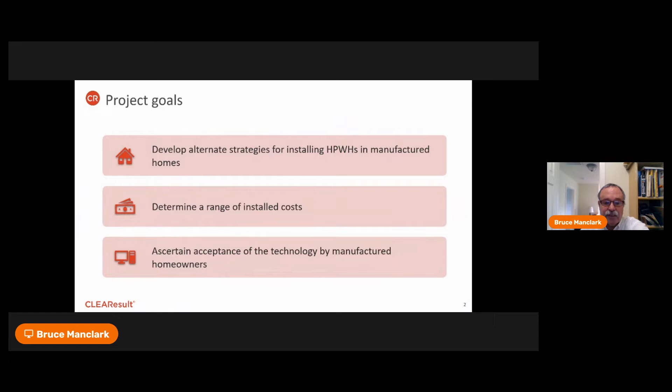These were the project goals. We wanted to really figure out how to put heat pump water heaters in manufactured homes. And we also wanted to determine a range of installed costs. A warning here, all installed costs that I'll show later on are not adjusted for the last year rapid increase in prices, especially with heat pump water heaters. Now, also, we interviewed the consumers at the end to see if we drove them crazy or not by putting a heat pump water heater in their house.

Not to get all Dick Cheney on you, but sort of, the unknown unknowns, right? Stuff that you should have known. Site selection, boy, we learned a bunch there. Breaker size on manufactured homes was a surprise to us. And whether it's rear discharge or side discharge was also a big surprise. Costs, we're saying it's anywhere from $300 to $700, and that would be excluding any electrical upgrade, which would be probably around $500. And to give the answer away, we had high customer satisfaction off these.

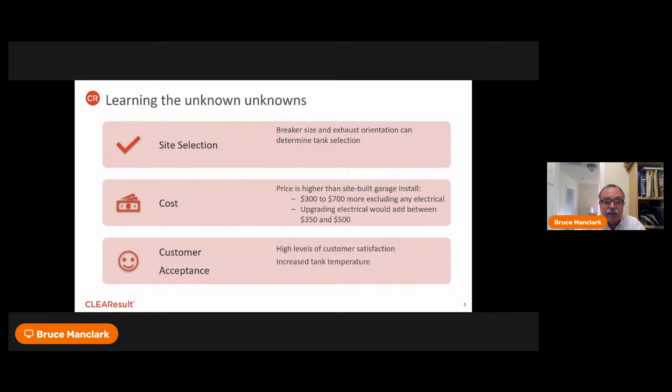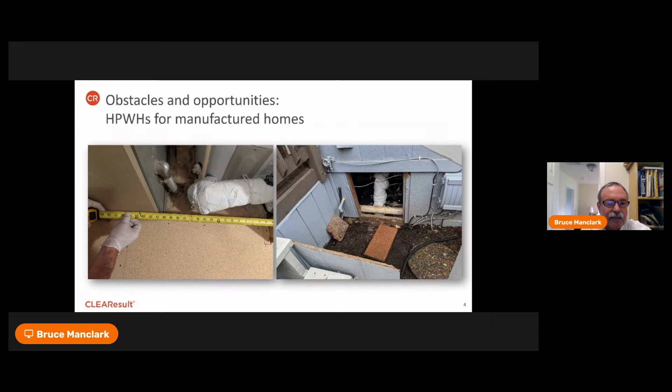For those of you that have not worked in manufactured homes before, it's by definition tight spaces. I mean, there you have the crawl space underneath the house. And of course, you have the main line there and the sewer line and everything else running to get in your way. Just for those of you who don't know, manufactured HUD code homes do not require an isolation valve for the water heaters, which complicates things like draining the tank, obviously. And the closets they're put in are always tight.

Yeah, guess what? Rather than having a 30 amp breaker like most site builds in the Northwest, these had a 25 amp breaker. And the implication of that was we either called an electrician, again, maybe at a $500 cost, or choose a tank that will accept the 25 amp breaker. And there's one of them out there.

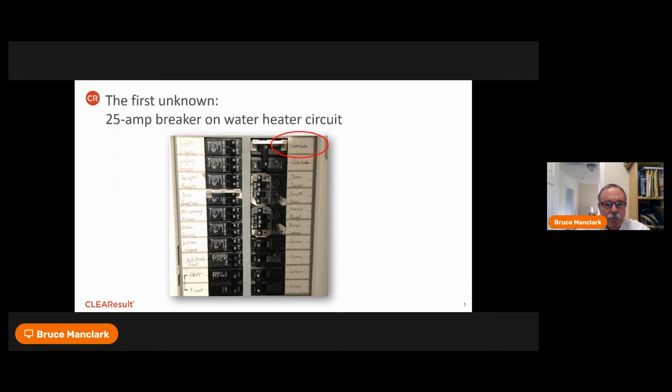Utility room example, just to kind of give you a feel here, more tight spaces, and the technician on the right-hand side has a jigsaw out, and we had to enlarge the opening of the closet in a lot of these homes just to get the tanks in place.

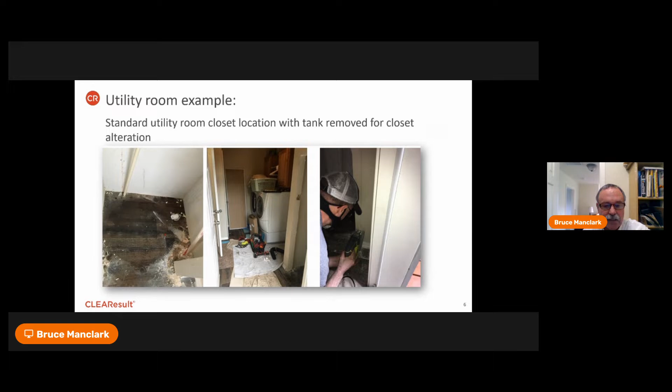This was sort of a really nice example, and I'm going to spend a little bit of time on here. The real use of the installation pad here was to get around the fact that the plumbing comes in from the bottom, and the heat pump water heater with a pan underneath it had a wider base, so they weren't exactly aligned to go up. So basically what that pad with that notch allowed us to do was come out and over.

Another thing we found out about HUD code is, despite the fact that they go on pressboard floors all the time, they do not require something as simple as a drain pan.

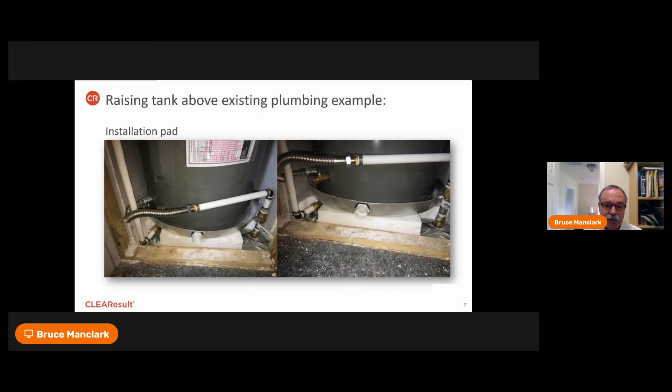If you are going to duct it, especially on a side or rear discharge, you have to allow for at least 5 inches for the duct adapter itself. I think one of the major manufacturers is going to come out with a unit that's going to be both intake and exhaust ducted off the top. That would help us in several locations in regards to space.

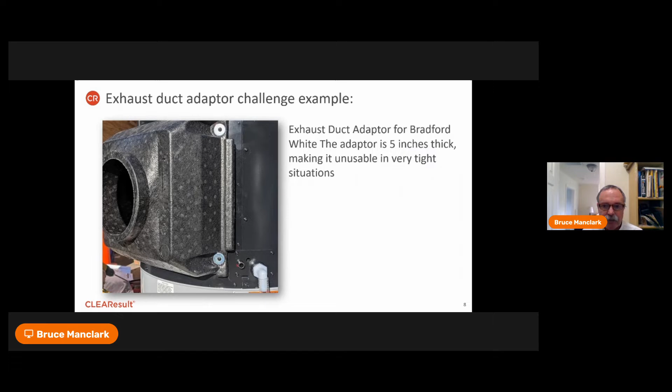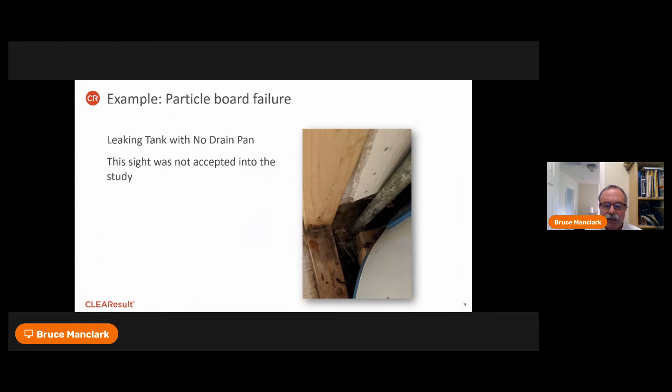Okay, I wish you could see just how rotten this floor really was. They had a small leak, and basically, if we had to repair the floor, we stayed away from that site. And unfortunately, there were quite a few that we did not accept in the study, just because of that rotting floor problem that something as simple as a drain pan would have probably addressed.

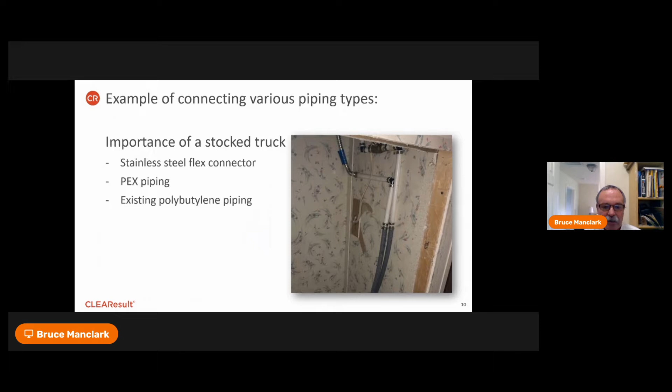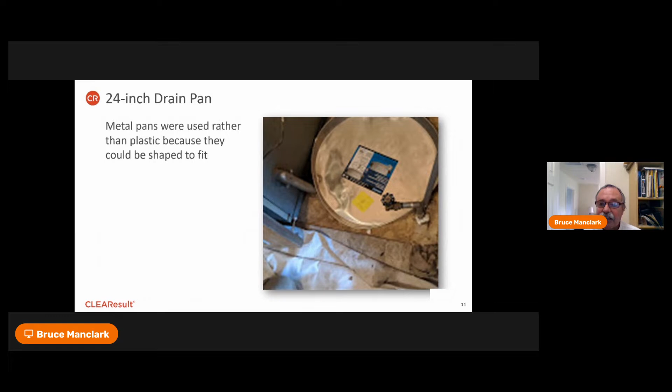This is a picture of a drain pan that looks like it's beaten up. The reason it looks beaten up is because we had to take a hammer to it to get it fixed. And this is a good reason not to use plastic drain pans, because they're not as malleable, and hitting them with a hammer doesn't have the same impact. So, this was at one of the few houses that had an isolation valve. It doesn't look like it came from the factory that way, though.

If you are going to install heat pump water heaters with ducting, the plumber also has to be a reasonably good carpenter. And this individual was one of those. This was a double ducted job, and this was in a bedroom closet towards the end of the manufactured home. We called it double ducting, where we took the air from outside and we deposited it back outside.

These homes were in Western Washington, where we have fairly mild winters. If you did this in a colder climate, you would probably hit the compressor shutoff temperature way too often, and you'd be operating as an electric resistance water heater quite a bit.

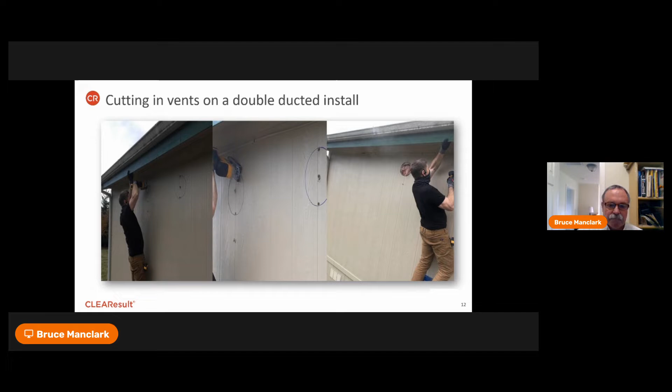Even some of the duct adapters, in order to fit, require just a little bit of modification. I think if I have one big takeaway from this, if you're going to go to non-standard installs, the installer has to be creative and up for the challenge.

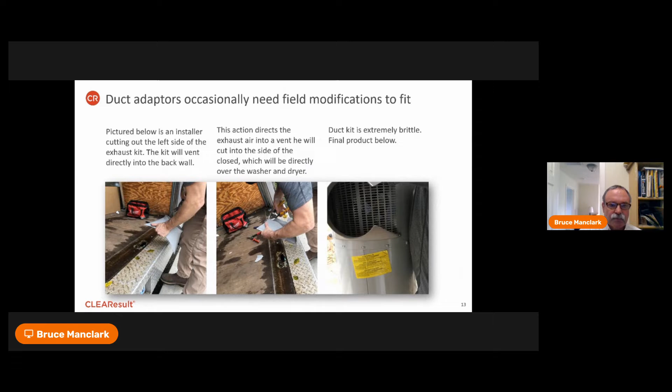The install sequence, we did a lot of screening. We did a lot of virtual screening, and the individual that worked for us got really good at it. We do have remote screening software that we use. And basically, right off the bat, we looked at breaker size. We looked at how big that closet was. We had them get the tape measure out so we could figure it out.

We looked for floor damage. And of course, we got their consent, saying, hey, do you mind, we're probably going to have to make your closet a little bigger. So we got some consent there. And then when it came to tank selection, the important part was the breaker size.

The size of the household, that kind of got us a surrogate for how much hot water they use, and whether it was rear discharge or side discharge. And again, a tank that discharged and took the intake off the top would have given us more flexibility than we had at the time.

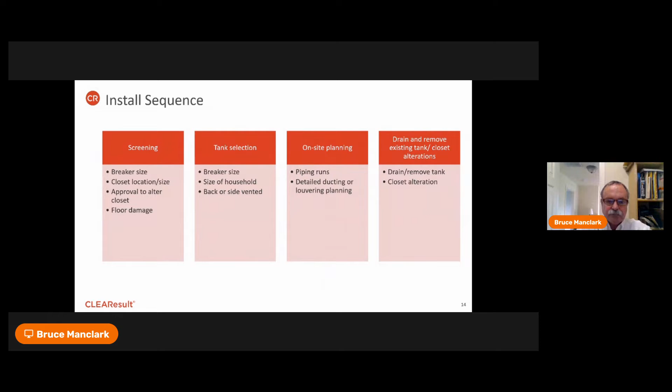Once we got to the site, again, this was really up to the installer, but we figured out the piping runs. I helped with any louvering or ducting that we had to do. Then, of course, it's drain, remove tank, closet alteration. And again, if the house didn't have a control valve at the tank, that meant you had to shut off the water supply to the whole house. And we modified the closet as needed.

Install sequence, it was, install the ducting, or any louvering. We did that drain pan installation at that point. Sometimes that hammer was required. Placement of the heat pump water heater, lift tank into place. When you've got a drain pan sitting on a piece of styrofoam and a narrow space, it's kind of hard to get a hold of that.

We never did investigate the water tank lifting devices, but I think if we did it again, they would have come in really handy. And of course, you have to orientate the tank in the right position, connect the ducting, do the plumbing, fill the tank, connect the PT, drain, and condensate lines, which sounds easier than it actually was. And then commissioning, where you wire, energize, check for leaks, and observe the startup sequence. The one thing missing here is the step of customer education.

Methods to overcome that restricted space. Basically all the manufacturers right now are around 700 cubic feet. So by definition, we had to overcome restricted space or volumetric constraint on every house that we went to. 3 of the homes we did double ducting, intake and exhaust. The most common one was inside to inside.

One of our favorite techniques was to take the air out of the utility room, which sometimes had the electric furnace with the water heater, and we dumped that air, if it was connected to the kitchen, right behind the refrigerator, so we wouldn't get any "gee, you're blowing cold air on me" complaints. Inside to outside, this is my least favorite form of ducting, especially in cool and cold climates. You're really adding to the infiltration load of the house when you do that. And then we did some creative louvering on 4 of the units also.

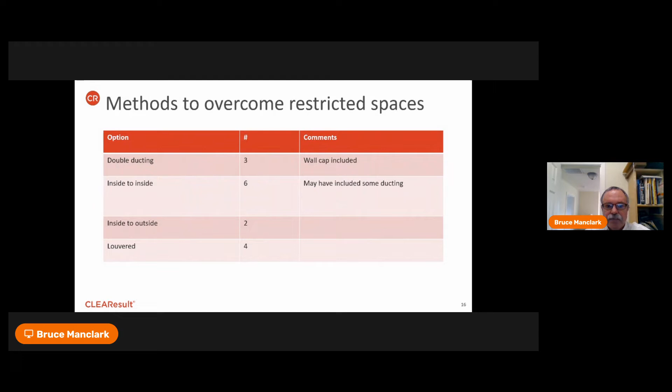Here's a nice example of us modifying a closet. Basically, we took one whole side out, and that allowed us to orientate the tank in a way that made sense. And this is an example of where we took the air and discharged it directly behind the refrigerator, which was in the adjoining room in the kitchen. You can also see here in that lower right-hand corner and the door in the right-hand picture, that's a return for the furnace. So we did have a built-in louver, if you will.

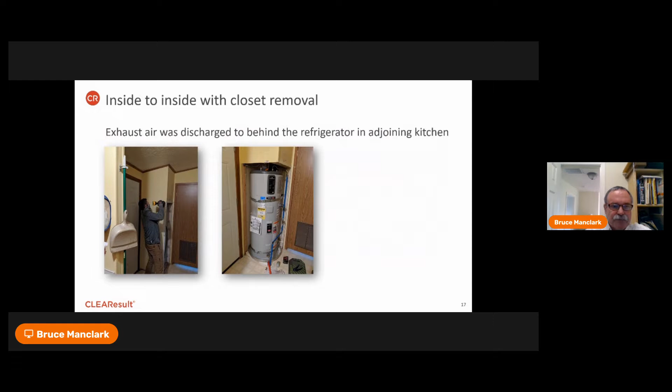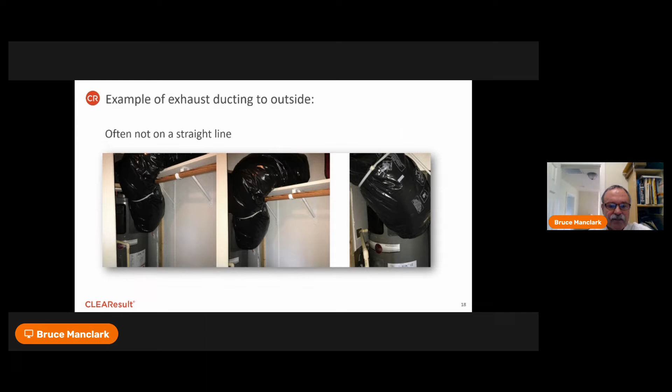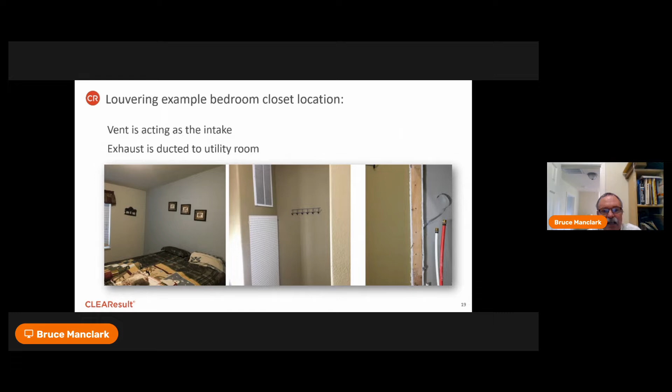Louvering, this was interesting. The pegboard was already in place on the lower half, and we added a nice big, essentially an HVAC return grill going in there. And we exhausted the duct back into the utility room. So that both these served as the intake, and we had an exhaust going out.

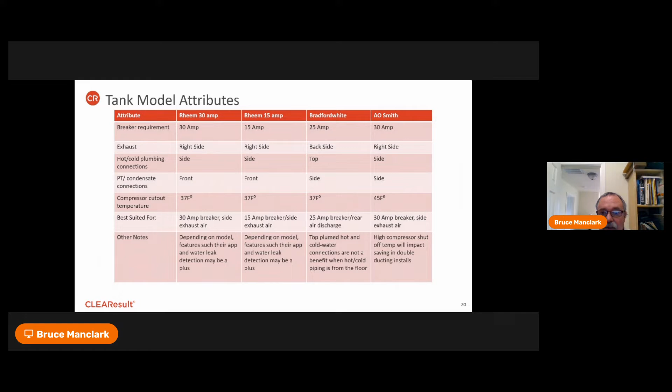A lot of information on here, and I know these slides will be given out. These were sort of the tank model attributes, and the one that we used was the Rheem 30 amp. This chart shows whether it's right or rear discharge, etc. Hot and cold plumbing, whether the plumbing's on the side or if it's on the top, what the compressor cutout temperature is, and sort of what it's best suited for. That one Rheem 15 amp, it was for a single person household. And the big difference there is that we only needed a 15 amp breaker, and the load of the house was really quite small.

Tank selections, we used one A.O. Smith product, and that's where the homeowner installed their own 30 amp breaker. I'm correcting myself here. The one Rheem 15 amp was a 2-person household, but still they didn't use much hot water. And the Rheem 30 amp, where again the homeowner switched out the breaker, and then just because of the breaker amperage, we used 12 Bradford White products.

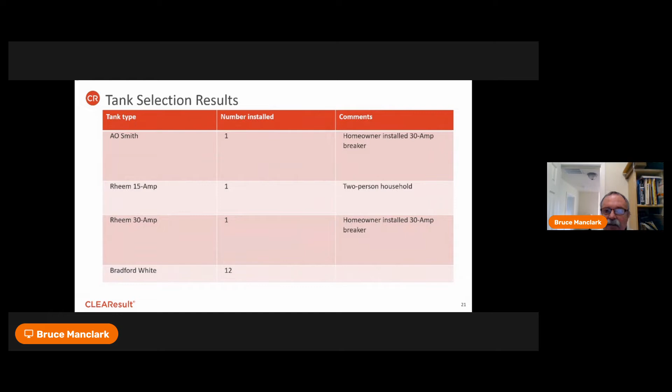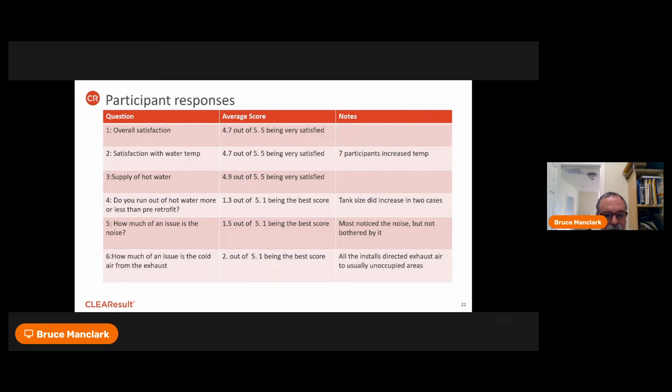And then the last question was, does the cold air coming out of it bother you? We got a slightly higher score there. We got 2, but we did our best not to blow cold air on kitchen tables or where people watch TV. And again, behind that refrigerator seemed to be a successful tactic. This ended up being the tank selection that we had.

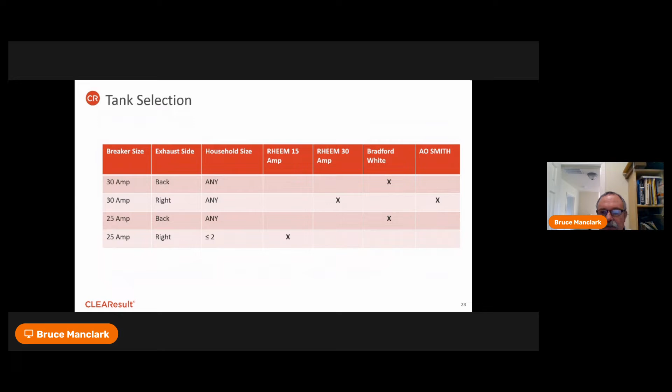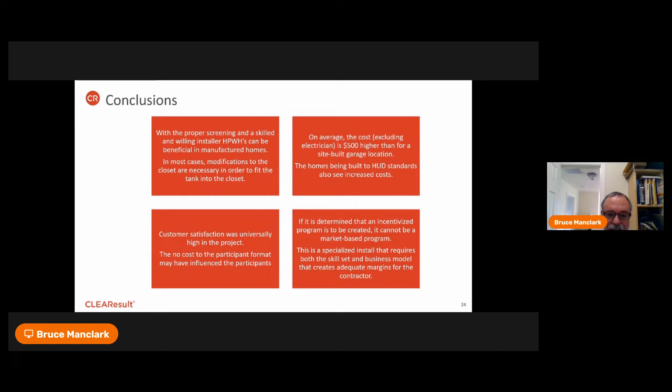And if you want my personal opinion, this is not a program that is for every installer. I don't think it's going to be a market-based program. I think you want to create a fixed price offer and go out and recruit manufactured homes and give that homeowner a really good deal. It must fit the skill set and the business model of the installer. Or I could just say, if we picked the wrong installer, this project wouldn't have worked.

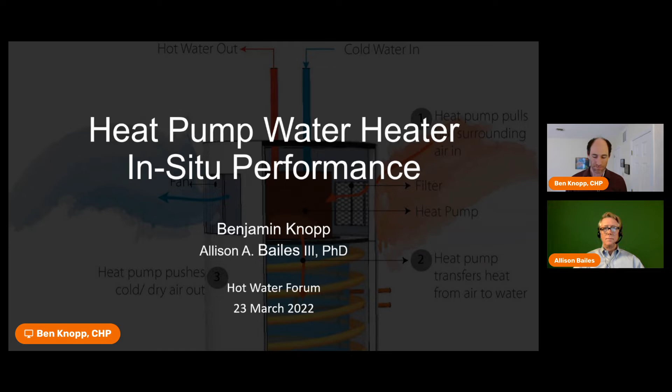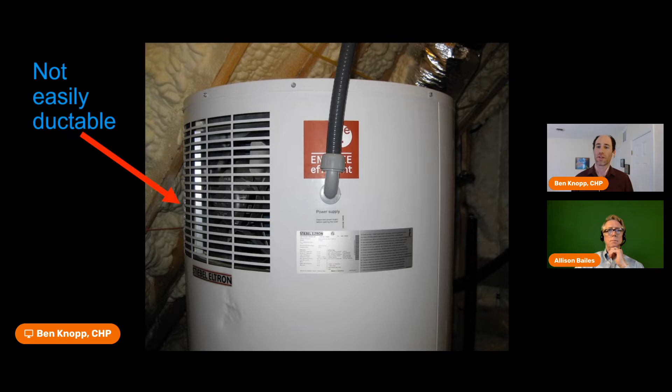So what we've done is analyze data from installed heat pump water heaters, and we'll get right to it. In this study, we're looking at just packaged heat pumps, so we're not looking at any split heat pumps. But the two basic types of these packaged heat pumps are ones that are not so easily ducted and ones that are easily ductable.

Just for those of you who aren't very familiar with heat pump water heaters, they draw in room air and have a compressor inside that concentrates that heat down into the water, and then they blow out cold air, and when it's humid, that air becomes dehumidified somewhat.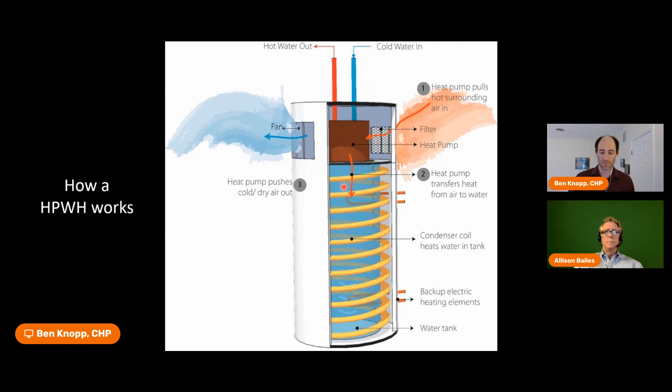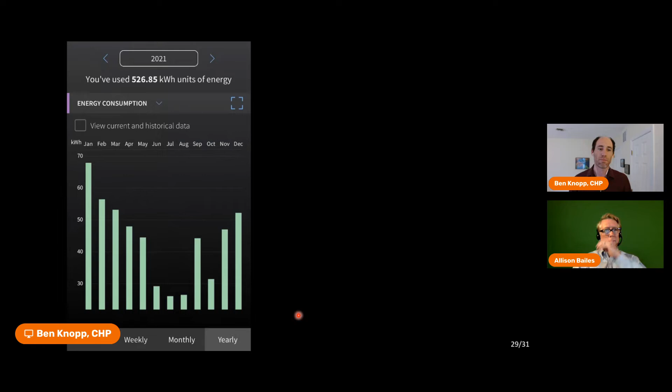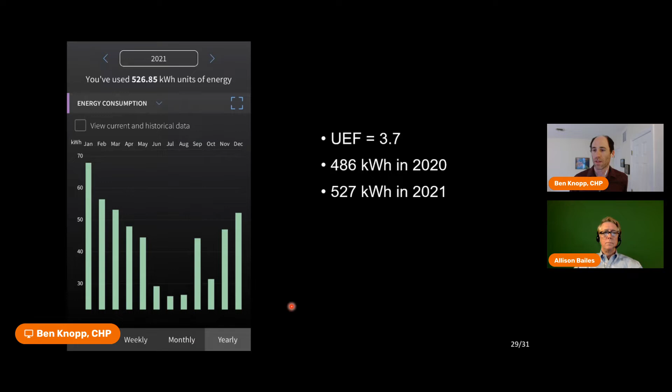So his is rated with a UEF of 3.7. It used 486 kilowatt hours in 2020 and then 527 in 2021. This is a couple years of data, I guess. And we talked about that jump in September. He had a 3.5-year simple payback for his water heater.

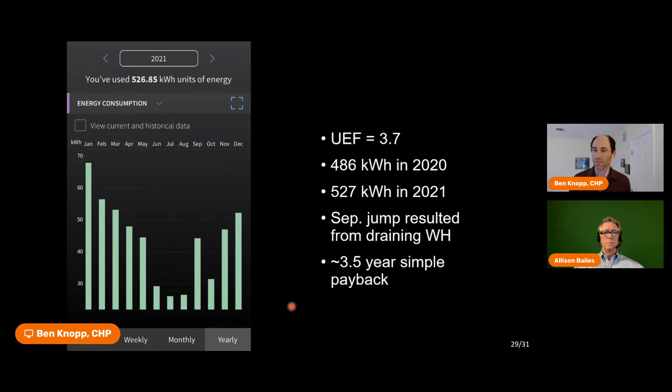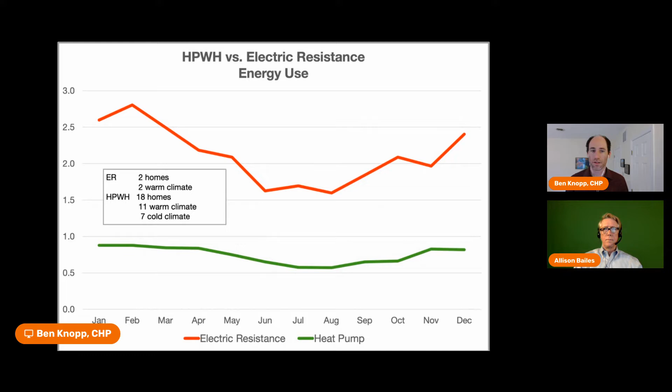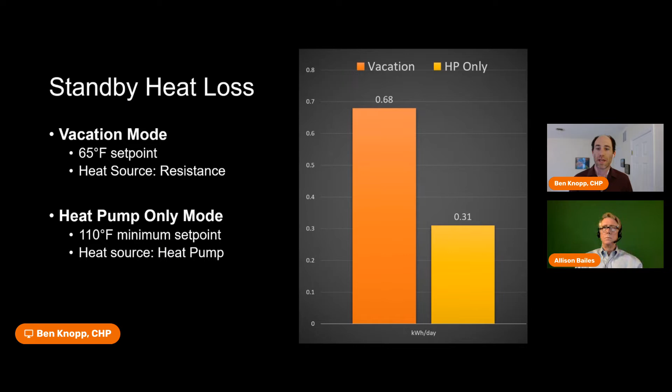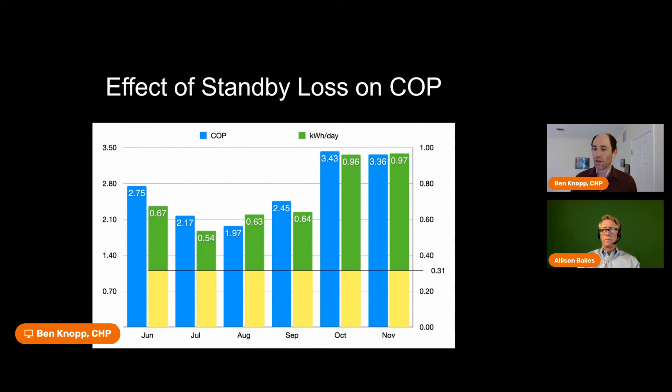Another interesting thing is that a lot of people, when they think about heat pump water heaters, they're like, oh, it's robbing heat from my space. Oh, my heating system has to make up that heat. What's interesting is you don't hear that a lot about refrigerators, which are very similar, but just the opposite. They're adding heat to your space. But you don't generally hear people saying, oh no, is it going to overwhelm my air conditioner? And is it going to make me super uncomfortable to have a refrigerator right in the middle of my kitchen

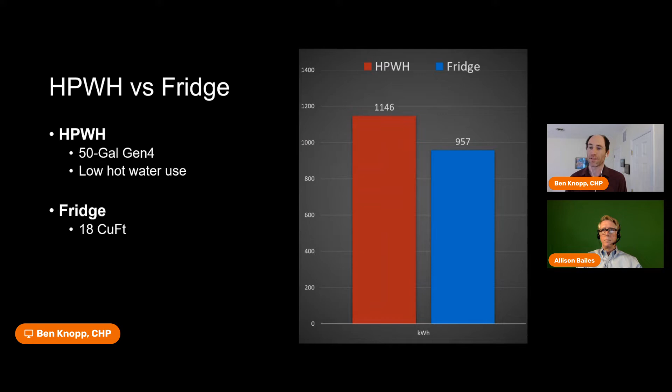So one myth that we like to address is that heat pump water heaters are just for warm climates. So what we did was just analyze a cold climate. We took Anchorage, Alaska, and used some incoming water temperature models from the Florida Solar Energy Center that allowed us to map what the incoming water temperature would be. We took into account the extra heat that would need to be added to the home in Alaska throughout the year. And we assumed a cold climate heat pump with electric resistance backup heating to make up the heat that the water heater stole from the air.

Assumed 300 days of heating up there in Alaska and an average water temperature of 43.3 degrees, and still had a COP of 1.72. So still, from an energy standpoint, still beneficial in a climate as cold as Anchorage. So we wanted to point that out.

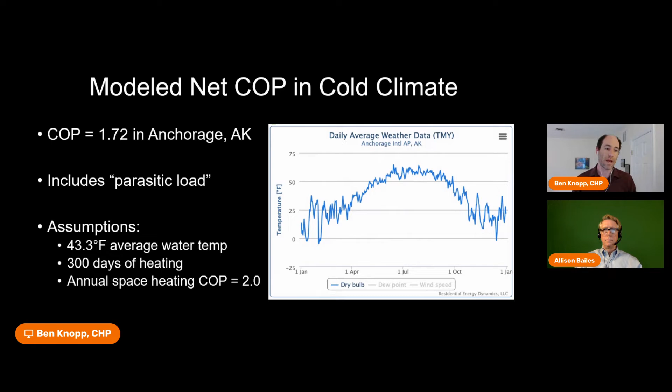Also wanted to have a look at how filtration impacts the airflow of a heat pump water heater, and look at its impacts on keeping the coil clean. So we measured a couple Rheem 4th generation heat pump water heaters with a clean stock filter and got 125 CFM and 130 CFM. And the settings indicate that the fans have 2 speeds, but we've only ever observed low speed.

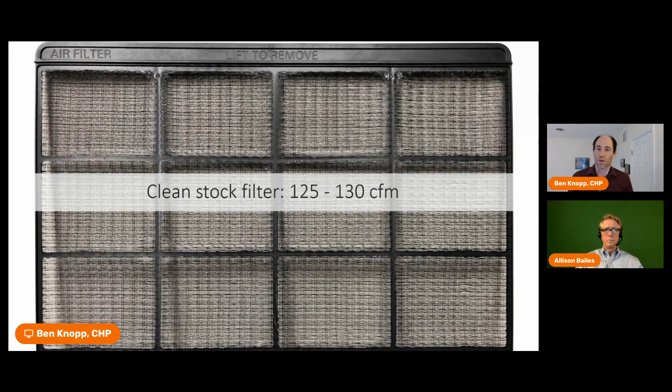So an experiment that we did was duct it to a MERV 13 filter, which might sound crazy, but it was oversized, so a 12 by 24 by 2 inch MERV 13 filter, and it had a very minimal impact on the overall airflow. Knocked it down to 121 CFM, so like a 3 to 5% drop in total airflow through the heat pump water heater.

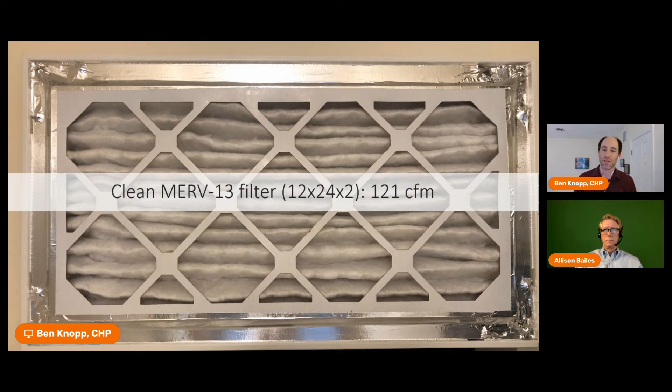Then I left the filter for almost 3.5 years without changing it. And this is what it looked like at the end of its life when I decided to replace it. And I measured the airflow, and it was still 119 CFM. And all these airflow measurements were with a highly precise powered flow hood, so they're extremely accurate airflow measurements. So yeah, that's a pretty nasty filter, but still moving a perfectly fine amount of air.

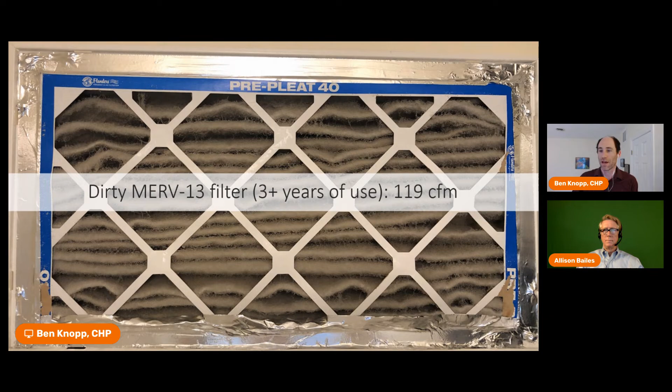So, conclusion on that is the stock filter does a decent job. If you want to keep your coil pristine and not have to clean that stock filter every few months, you can put in an oversized MERV 13 and really forget about it for years and have a pristine coil. Also, the dust itself as an insulator reduces performance of a coil. But what is harder to see is the biofilm that starts to build up on a coil that gets wet, like a heat pump water heater coil. So if you want to keep your coil pristine, these water heaters can handle an oversized MERV 13 and do great.

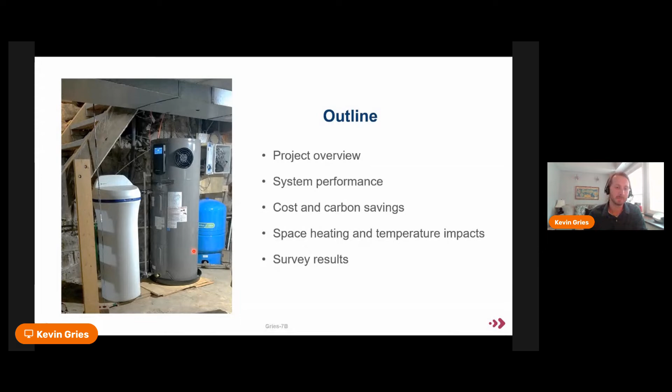So I'll start by going through performance of the systems, the cost and carbon savings, and then we also took a particular interest in trying to quantify if the stolen heat from the heat pump water heater was causing the furnace to run more. And then we'll go through the survey results.

So our partner in this project is called MECA. It's the Michigan Electric Cooperative Association. So they oversee 13 municipal utilities and electric cooperatives in Michigan. So they tended to be in rural areas, so a lot of single family homes, a lot of electric heat, and a lot of delivered fuels.

For the program, at least the field study, we identified 9 sites from people who got rebates on heat pump water heaters through an energy efficiency program. And all of the heat pump water heaters in our study were 50-gallon tanks. They had UEFs around 3.5, and they were all installed in basements. We did a year-long monitoring from 2020 to 2021, and then we also conducted a survey of 81 households.

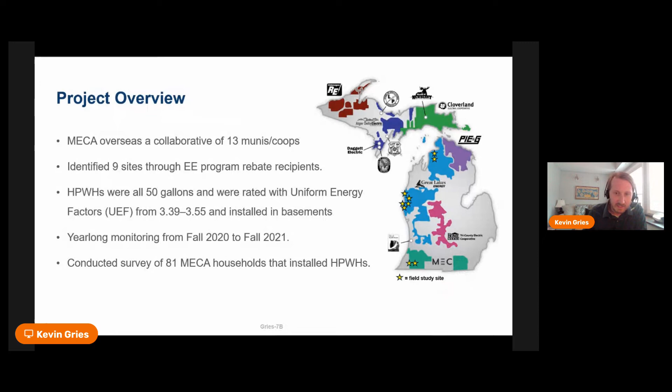So you could see MECA utilities are all the colored polygons here, and the stars are where we did field studies. And the survey could come from any of those colored areas.

So the measurements in the study were pretty robust. We measured water temperatures, water flow, air temperatures, and current each second, and the power data and whether the furnace was running, we recorded that each minute. And then we also put a monitor next to some auxiliary heat to make sure people weren't running auxiliary heat, or at least controlling for that when we were estimating the space heating load of the house.

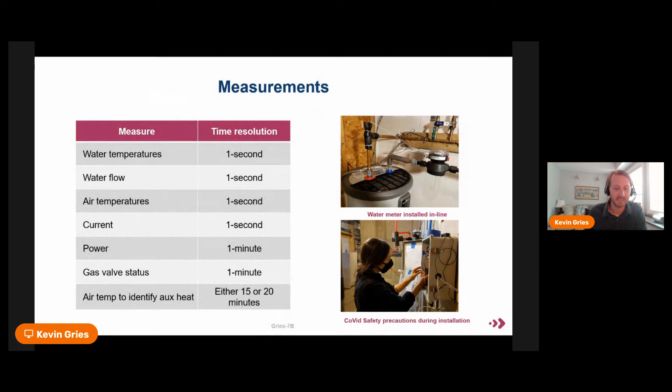So we were particularly interested in testing heat pump water heaters in cold climates. And as Ben mentioned previously, this can be more challenging in cold climates because first, the groundwater temperature is lower. And then second, we're installing them in basements, and they weren't conditioned basements. So they tended to be colder than maybe a California garage would be, around 63 degrees Fahrenheit on average. And that can impact the compressor performance.

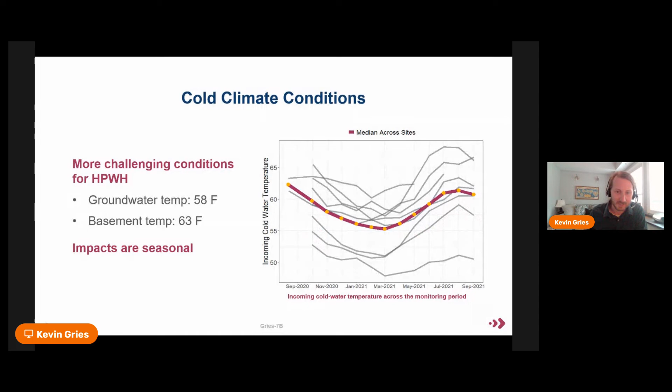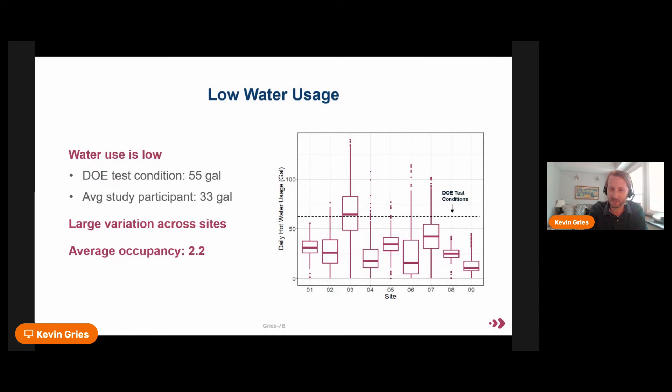So in general, and this is a big factor in the study, we had lower water usage than at least the DOE test conditions where they rate heat pump water heaters. So from the figure on the right, each one of those box plots is each site, and the y-axis is the daily hot water usage. So they varied quite a bit across sites, and most of them are below the DOE test conditions.

On to the energy efficiency. So to clarify terms here, I think that Ben and Allison's presentation might have referred to COP as what we're referring to as energy factor. So what we call energy factor is basically a metric that in the numerator, we have the useful energy delivered to the house in the form of hot water. And in the denominator is the total input energy. It's electric energy in a heat pump water heater's case. And this is analogous to uniform energy factor.

So, and then the COP, for our purposes, we were just referring to the efficiency of the compressor. So not the whole system. So it doesn't include standby loss, basically.

Rated efficiencies were around 3.5, as I stated. Now, when you look at the field conditions, there are measured field conditions. We had a significant drop-off in energy factor. And the big reasons why this is happening, the first one is the water usage concept that I brought up earlier.

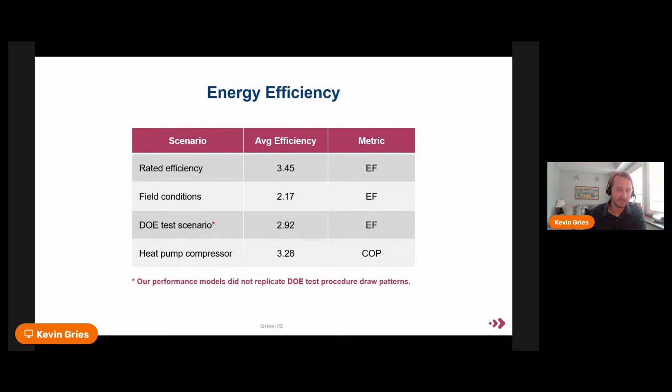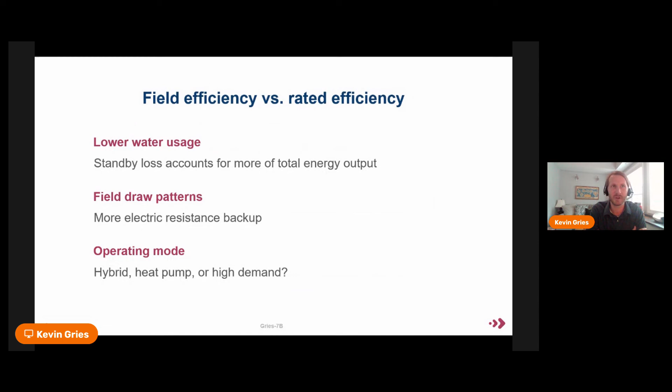As I kind of touched on earlier, the biggest reasons for this discrepancy is, one, the lower water usage really makes the energy factor take a hit. And then secondly, more electric resistance really drags down the energy factor as well. And that could be due to people using water in the field differently, like taking a shower and running the washing machine and the dishwasher all at the same time, or it could be the operating mode that the water heater's set in.

So speaking of the operating modes, hybrid is a common operating mode that we saw in our study, and that basically allows for the compressor to operate, but then when it really needs it, it can get a boost from the electric resistance backup heating.

So taking you through these two graphs, this is site 3, and we expect this one was in hybrid pretty much the whole time. And we see kind of an expected trend early where the energy factor is low on low usage days because that standby loss has a bigger impact. The sweet spot's around 50 gallons, 40 to 60, highest energy factors there.

As you start to use more and more water, then the dots become more and more yellow, which indicates a larger percent of the input energy coming from the electric resistance coils. So then the energy factor goes back down again.

In site 6, we saw kind of an unexpected pattern. We saw like 2 clouds here. And to be clear, these aren't 2 different models of heat pump water heater. So we suspect this first cloud is heat pump only mode. So that's just the compressor running. And we see that trend that we expected where energy factor goes up with usage.

But then once we get to that sweet spot of 50, a lot of the days appear to be in hybrid mode. And we think this is hybrid mode because both the compressor and the electric resistance coils are operating on these days. And the energy factor is just between like 1 and 1.5.

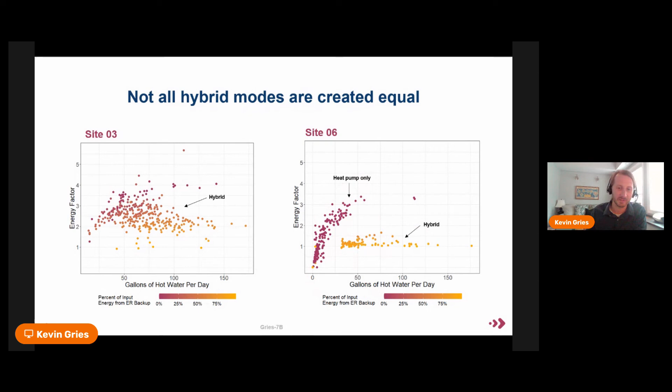But it just seems like in this site, the hybrid mode triggers a lot more electric resistance. And that could be due to draw patterns, could also be due to how the algorithm in the heat pump water heater is determining when electric resistance is needed.

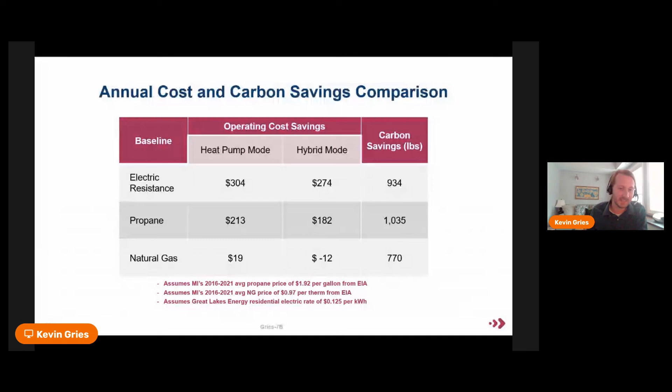Carbon and cost savings. So this is based on our model in cold climate scenarios using 50 gallons of water a day. We saw about $300 of savings with the electric resistance water heater as the baseline, which is great. And that will likely cover incremental costs. Propane was pretty good savings too. Natural gas, less savings, barely any savings at all. So still need work there.

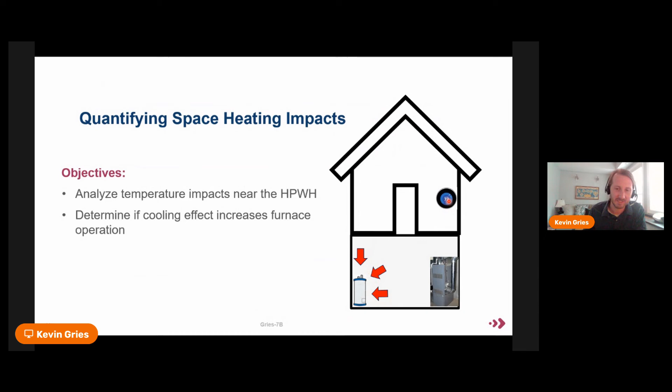Another objective of the project was quantifying the space heating impacts. So basically we have your heat pump water heater here, and it's taking in heat, stealing heat from the environment. And we wanted to determine if the heat pump water heater stealing heat from the environment is causing the thermostat to call for more heating from the furnace.

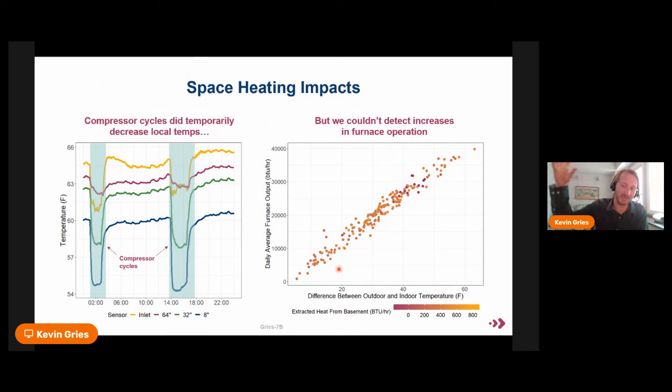But then we did some regression analysis to try to determine if that impact is actually causing the heating load or the furnace to run more. And basically we couldn't find statistically significant impacts. One of the reasons why is the heat that the heat pump water heater was extracting was only about 2% of the heating load. So that kind of just falls into the noise. Plus, the thing is pretty far away from the thermostat, so we couldn't detect an impact there.

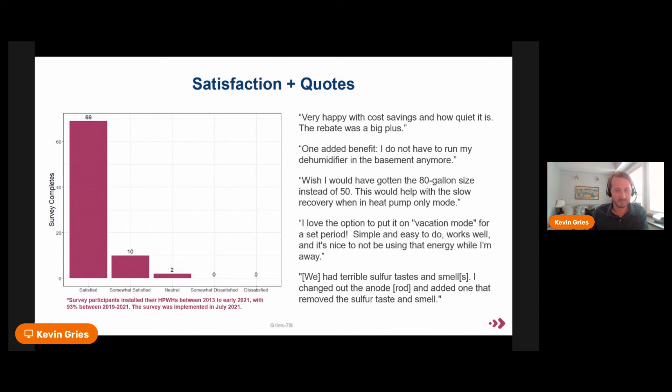We also noticed a couple people commented on anode rods, the wrong anode rod being installed in their water heater. And then they had this terrible sulfur taste and smell. They were able to fix it, but it's just something to consider for the future.

We also asked about the comfort impacts. So basically, were people uncomfortable by the cooling and dehumidification effect of the heat pump water heaters? For context, these are mostly single family home basement installations. So people aren't generally occupying the space next to their water heater in these cases. But most of them didn't even notice the change. A lot of them enjoyed the dehumidification and cooling benefits. So that generally didn't appear to be a big problem in our use case. Smaller houses, maybe different results.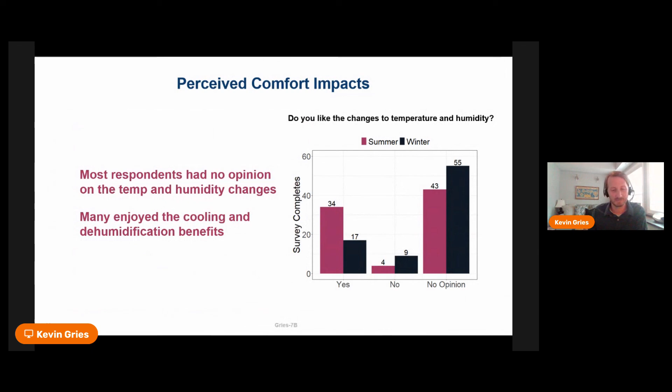Some concluding thoughts. Number one, people like the heat pump water heaters. That was great to see. Number two, there was significant cost and carbon savings compared to electric resistance water heaters. Three, higher water usage is going to have higher savings and higher efficiency, at least to some extent. So that's important for targeting candidates. Maybe something to think about when targeting smaller users. The control settings or operating modes are important for optimizing performance, and we didn't notice any impact on space heating, and people didn't seem to be bothered by the comfort impacts.

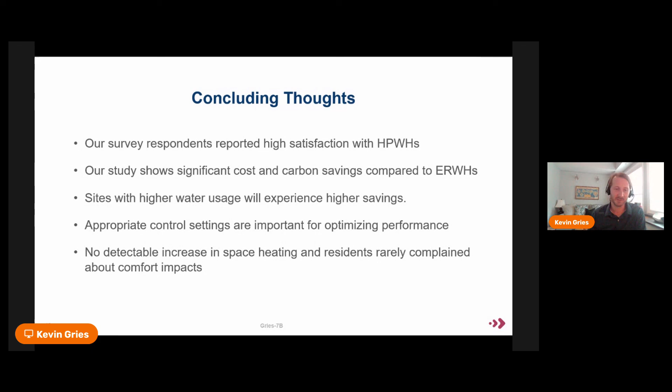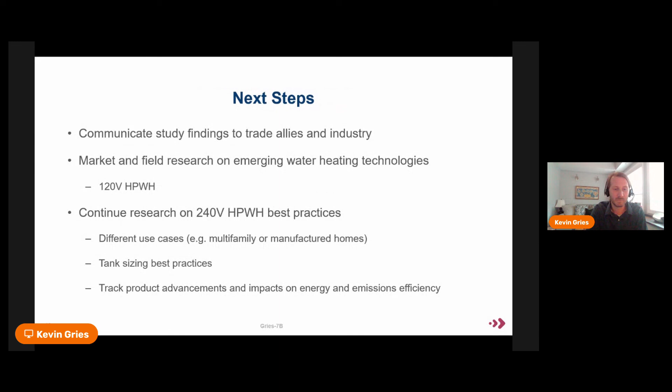Our next steps here are first to communicate the findings, as we're doing now, and then we're interested at Slipstream in researching more emerging water heating technologies, 120 volt heat pump water heaters, central heat pump water heaters, and then continue figuring out the best ways to deploy these 240 volt units.